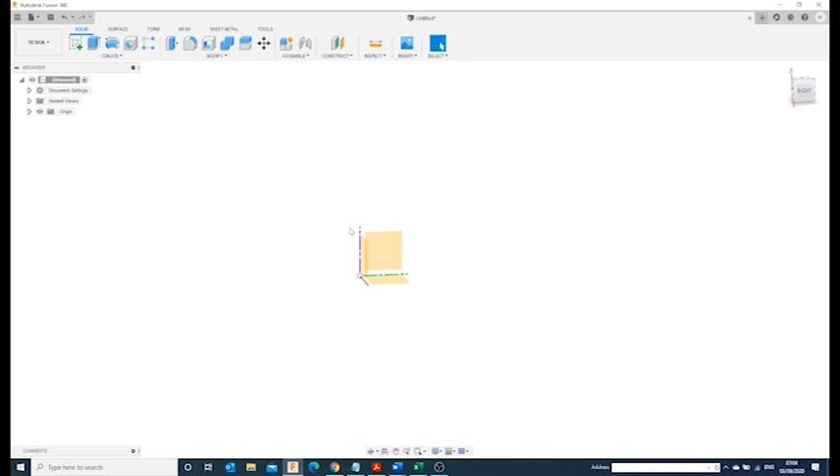What I thought I'd do is very quickly show you a new feature on Fusion 360, which is Emboss, and show you how good it is and also some of its limitations. What Emboss allows you to do is take any kind of sketch or image and actually lay it on top of a surface, which is great for us if we're doing things like domes and stuff like that.

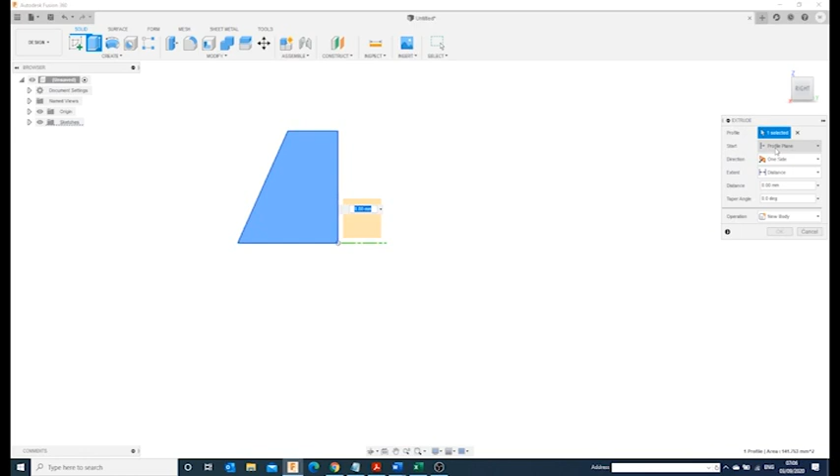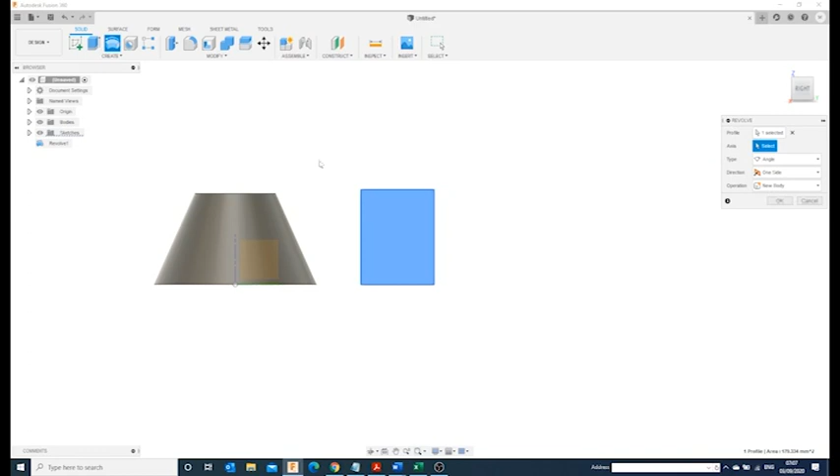So what I'm going to do first is revolve a quick angled dome like that. I'll show you three shapes and what it can do and also what its limitations are. The first shape is an angled dome. The second one is more what we would call an R2 body shape, albeit not quite deadly accurate. And the third one is a sphere.

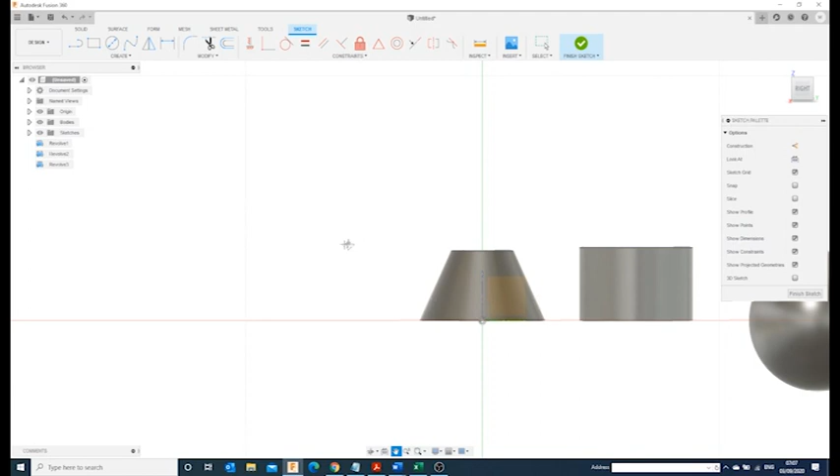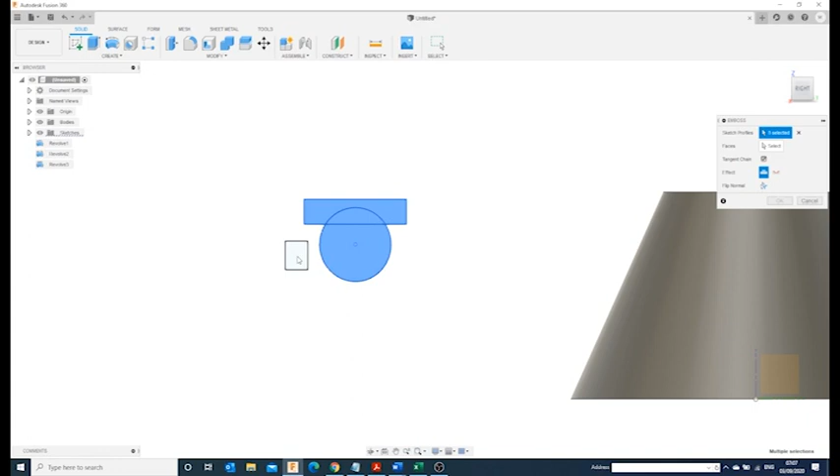So there you go. We've got three objects there. What Emboss allows you to do is, if we go into sketch mode, you can create a sketch. Now let's create some details. You create a little bit of a detailed object like that, and what you've got then is a new feature called Emboss, and it lets you select the profiles of those sketches, select a plane, and hey presto, you can actually drop it onto the plane.

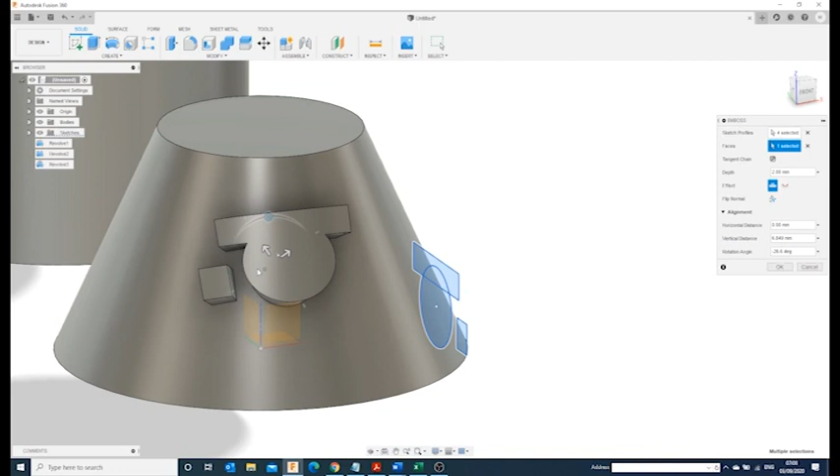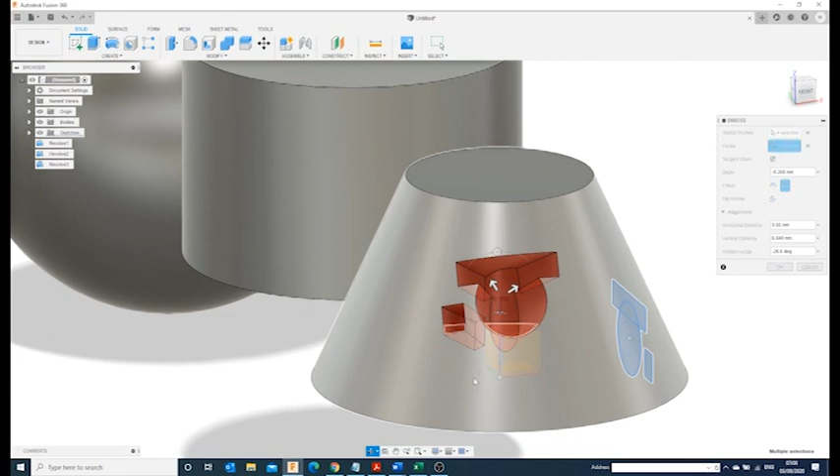Now the drawback with Emboss, from my perspective, is that it's very difficult to do perfect horizontal lines or pinstripes, because what it actually does, if you look, is it curves. You can see that line slightly curved, so it curves any straight lines to the angle, which it should do - it matches perfectly. The other thing is when you extrude out, it pulls it out or pushes it in, so it distorts depending on the size of the angle, which is mathematically correct. But what it means is if you want perfect tubes that fit into things, and the kind of details we've got, it becomes more of a challenge.

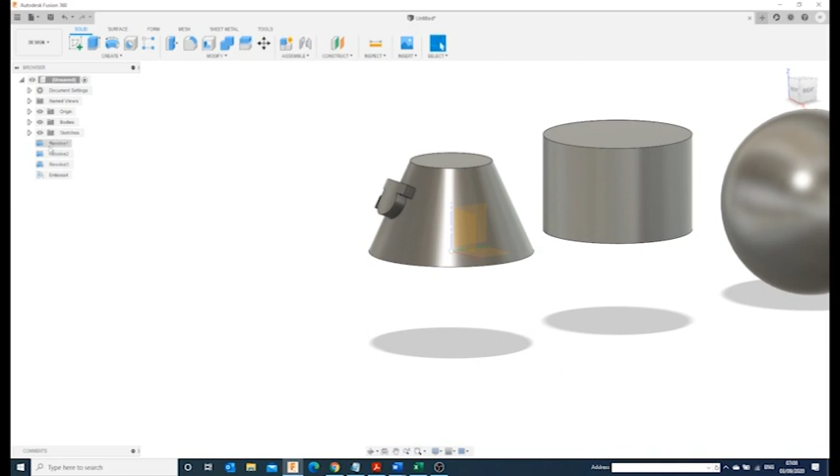But for adding quick details, it is pretty good. Let me just show you now. So that's on what I'd say two angles, which is a curved surface at an angle, or two areas of distortion. If we just do one area of distortion, create Emboss on something like a cylinder, you get this effect.

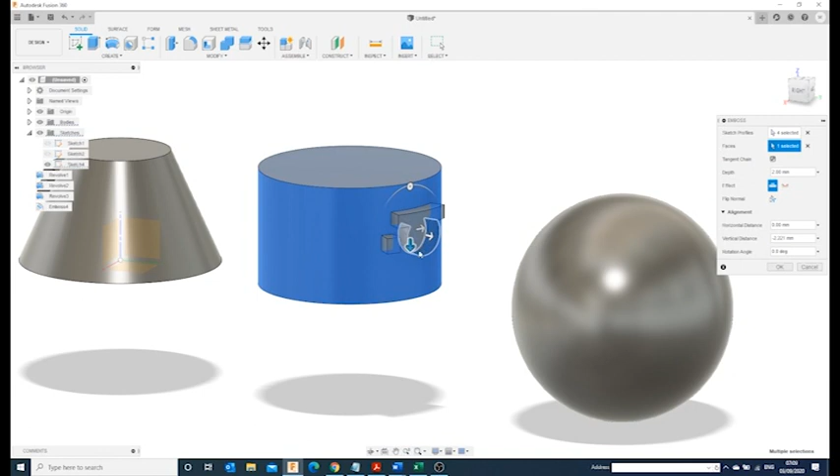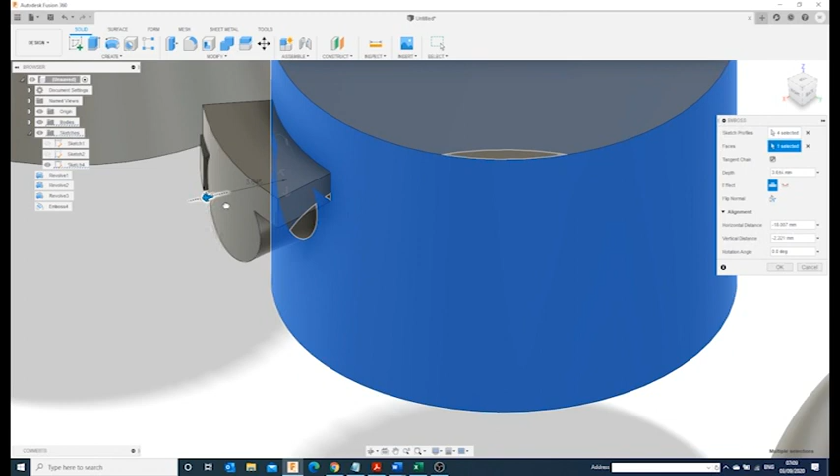There we go. So a lot more - you definitely get a straight line at the top, and it goes in, right? So it's quite good for doing straight lines on a straight cylinder. But again, when you pull in, you do get that distortion. So if you're expecting it to make a hole where you can fit something specific in there, like a tube, it becomes a bit more of a challenge, but it is pretty good.

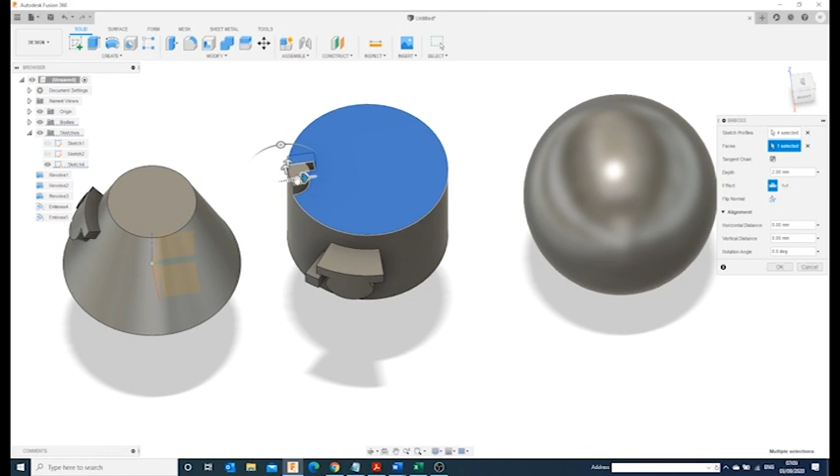And then the third thing I'll quickly show you is what happens when you try to apply it to a globe or a proper dome as we'd see it. If you click Emboss on there, what happens when you try to select that face is you cannot select it - try flat faces, it works, and obviously on flat faces you don't get any distortion at all. So for doing complex greebles, it's another option as opposed to sketching it actually on the face. The big drive has been around people wanting to add text to curved surfaces, which I know has always been something people have really wanted to do.

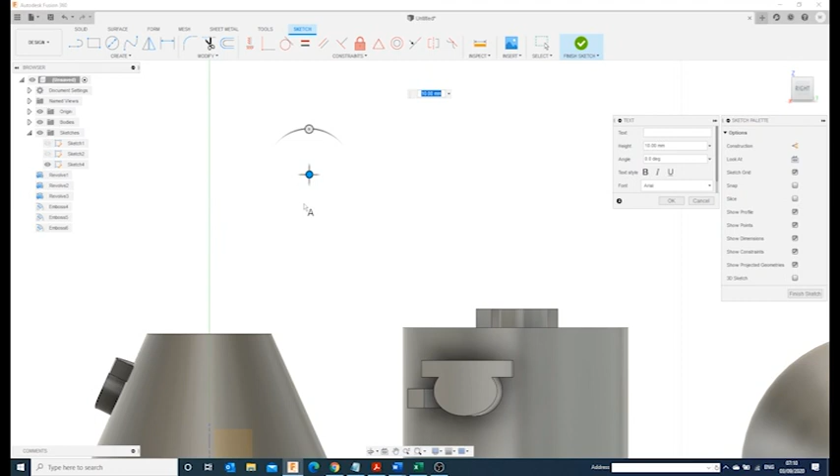So I'll just put 'hello' in there. Let's make that really small. Okay, highlight that. Create an Emboss. So yeah, you can add text to a curved surface.

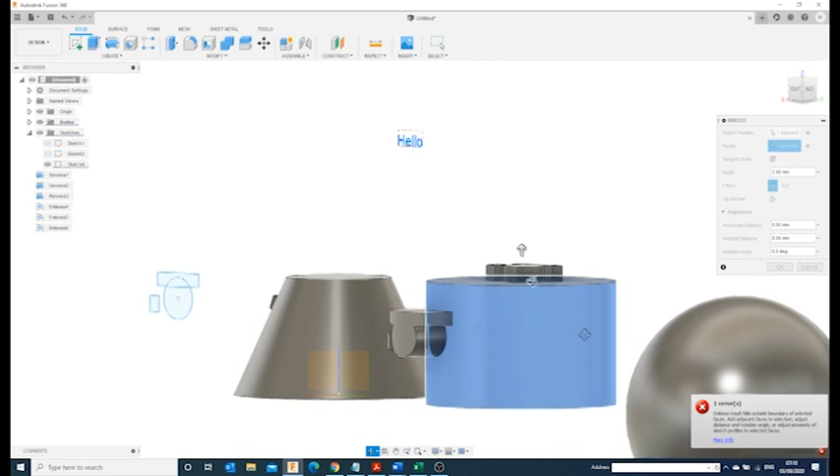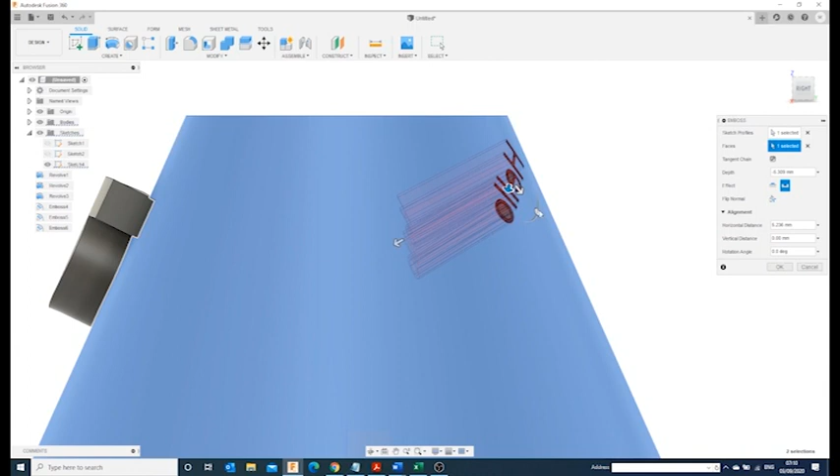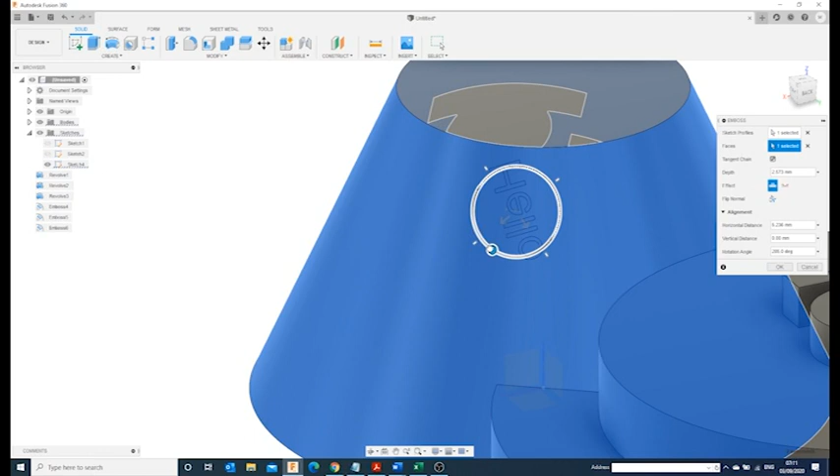Interestingly, it's kind of reversed itself, which I don't... there we go. So you can flip it that way, then flip it the other way. Anyway, you get the idea, but just have a little bit of play with it.

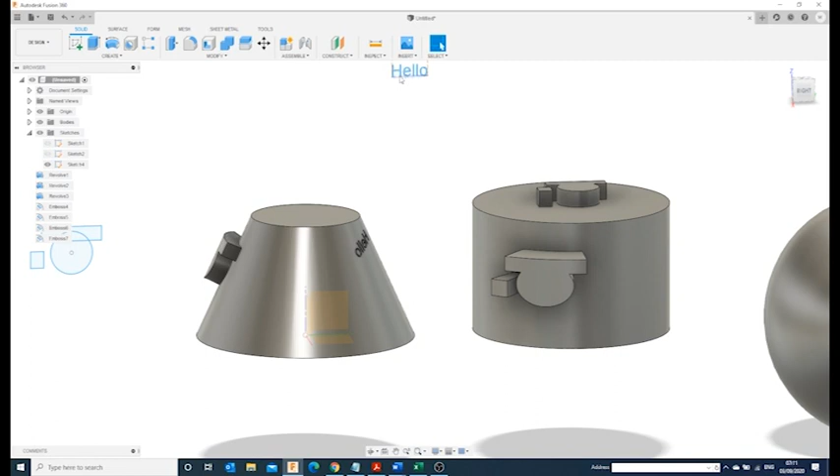But there you go, that's the Emboss feature. It lets you add sketches and text to different objects. I think what I've done there is probably selected the wrong side for embossing the text, but it gives you an idea of how Emboss works. Watch out for more videos.